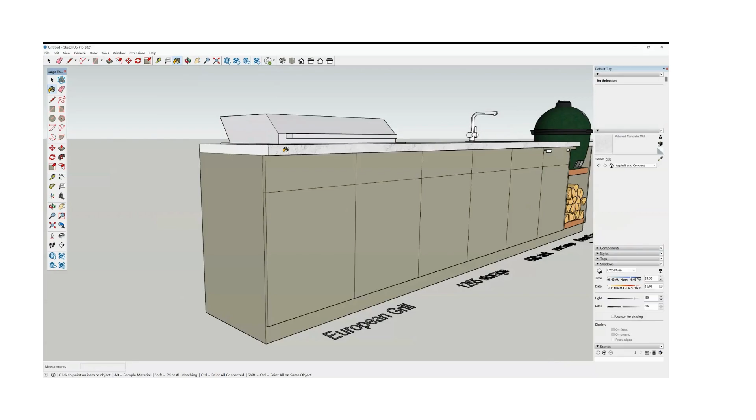Concrete is a popular choice for a worktop finish, so in SketchUp we can paint our ceramic worktops with one of the included materials. In this case I'm going to select polished concrete from the asphalt and concrete folder, and paint the top surface plus the ceramic edges or risers, using the rotate tool to get to the back of the worktop. You could also use concrete aggregate, or new polished concrete to replicate other suitable finishes.

In a later lesson, we'll show you how to import the whole range of ceramic finishes and use them to render the worktops and waterfall ends in a quite realistic way.

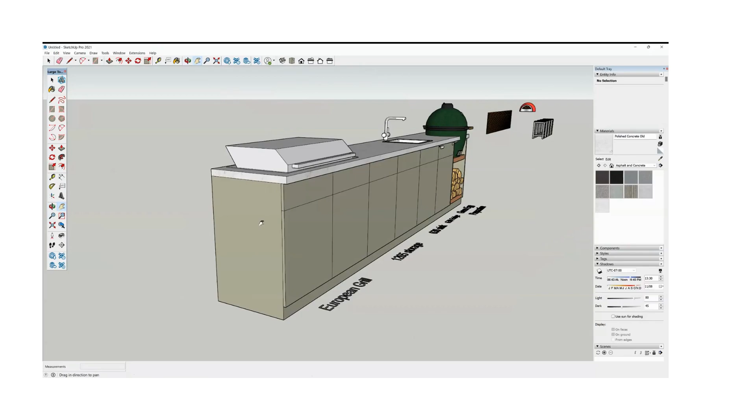Now we'll add a waterfall end to our kitchen. First, using the wheel on your mouse, zoom in to the underside of the worktop.

We're going to use the worktop itself to create a waterfall end by extruding it. Highlight the end, then using the extrude tool, touch the highlighted area and bring it out a little.

Now go to your keyboard and just type in 50. You'll see the numbers appear in the field in the bottom left-hand corner of the screen. You don't need to put a cursor in the field, just hit return. This represents a 50 mm extrude and it will therefore increase the length of the work surface by 50 mm.

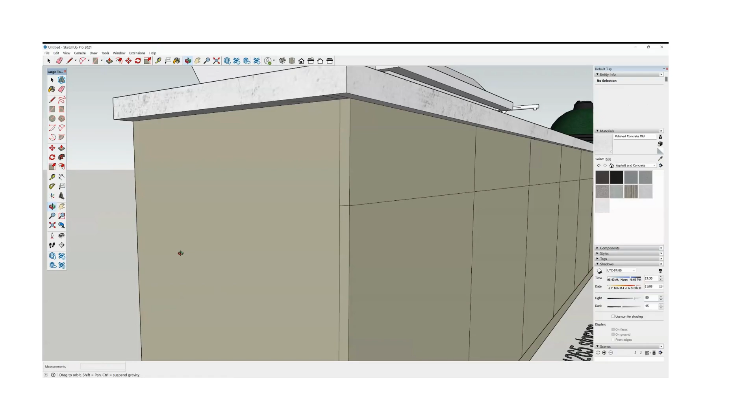Now get a little closer to the underside of the work surface and delete any structural lines that you may see.

Now we need to draw a line using the pencil tool from the back of the cabinet to the front edge of the work surface to create an extrudable area.

Once that pencil line is in place, you can highlight the area you have just created. Taking the extrude tool, touch on the highlighted area and pull it down a short distance.

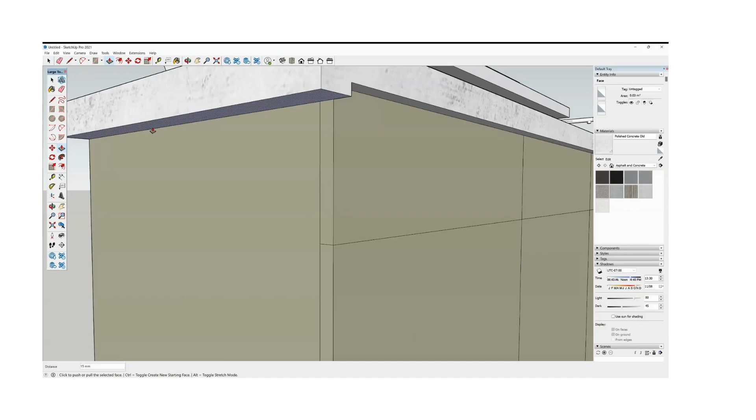At this point please type 965 on your keyboard and press return. That 965 will again appear in the field down in the left-hand corner of the screen. We use the 965 mm dimension as that is the standard height of a waterfall end.

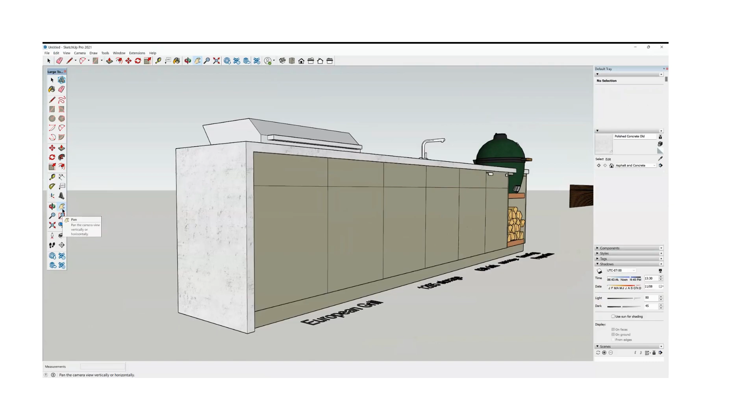Well done, if you followed this you will have created a ceramic waterfall end. You'll probably want to render it now, just as you did with the worktop, making sure to paint all the visible surfaces. Finally, before you present your design to your client, it would be good to add some measurements.

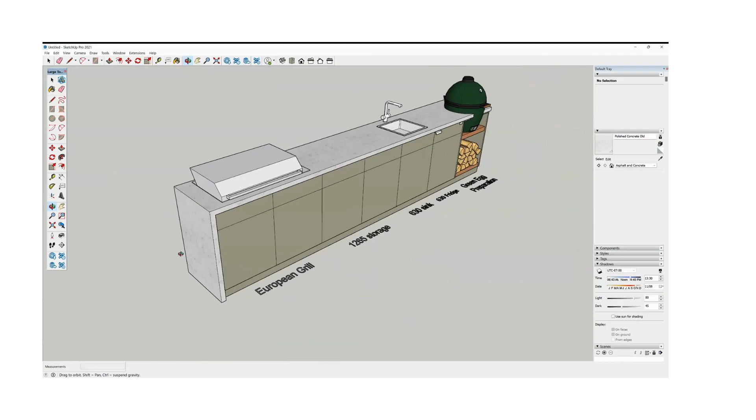Take the measurement tool and click on each end of the worktop, and then the depth. You can illustrate the overall dimensions of the kitchen. From the File menu, select Export to create a 2D JPEG which you can send to your client.

The next lesson will be about designing corner and U-shaped kitchens, also adding a breakfast bar. If you're happy with what you've learned in this video, please go to lesson 4, otherwise please start again.